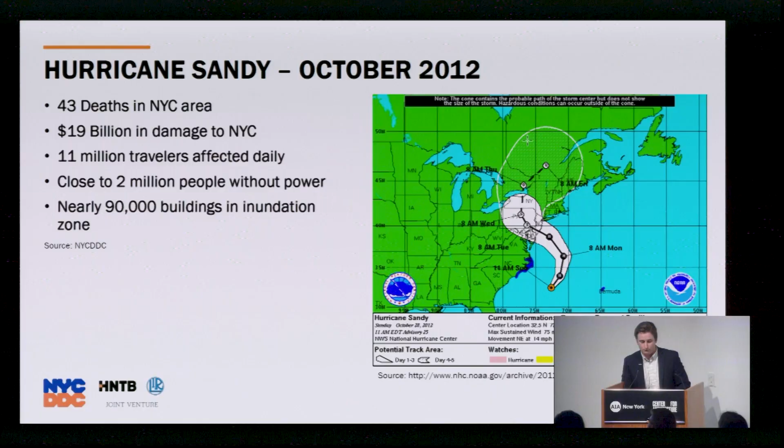Before I get into the design overview, I just want to give thanks and credit to the large project team that we have. This is a massive project, and I am by no means the lone designer. I'm part of the construction management team of HNTB LiRo-Hill.

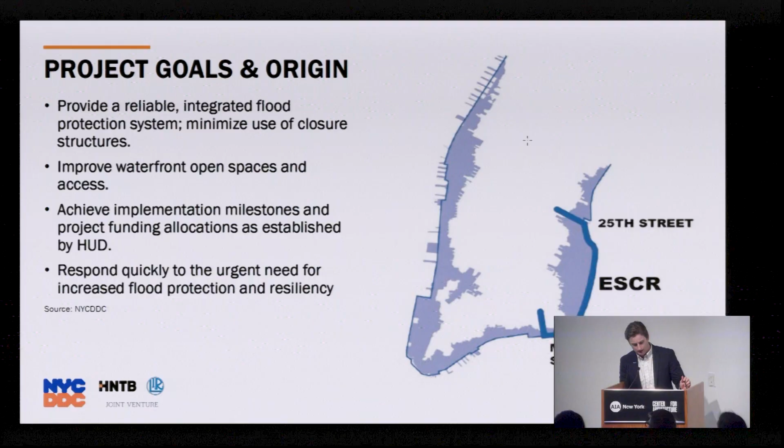The ESCR project ranges from East 25th Street all the way down to Montgomery Street. The main goals of the project and the program are to provide a reliable flood protection system with minimal use of closure structures such as roller gates and swing gates, improve waterfront open access and access to these spaces, and quickly respond to the urgent need for flood protection and resiliency in the Lower East Side.

So the site is 2.4 miles long, and it's now all protected under one program. You'll hear me talk about Project Area 1 and Project Area 2. Project Area 2 is to the north, shown on the plan to the right in gold, and that contains more of the active flood measures, such as flood walls and flood gates, as well as 3 parks.

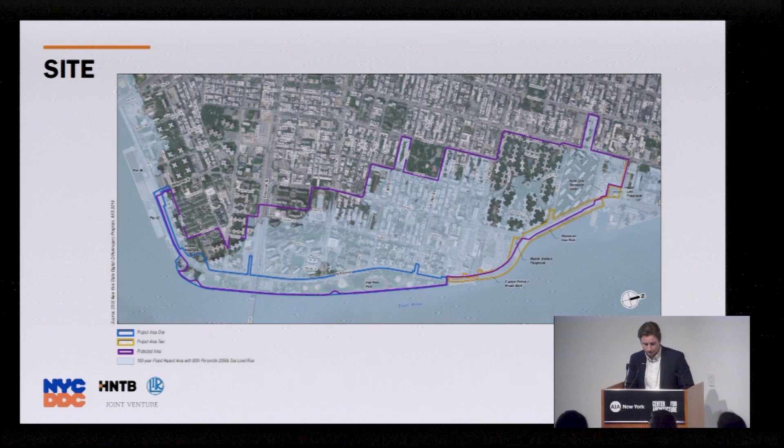Project Area 1 is the larger East River Park that runs from approximately East 15th Street all the way down to Montgomery Street, and that's the new raised East River Park itself. There are also several gates to the south. Speaking of raising the park, the existing esplanade, the previous esplanade, was 8 feet.

The new design elevation will be 16.5 feet, which is above the freeboard and wave requirement on the high end of the 2050 FEMA projection. So that's what the diagram on the right is showing.

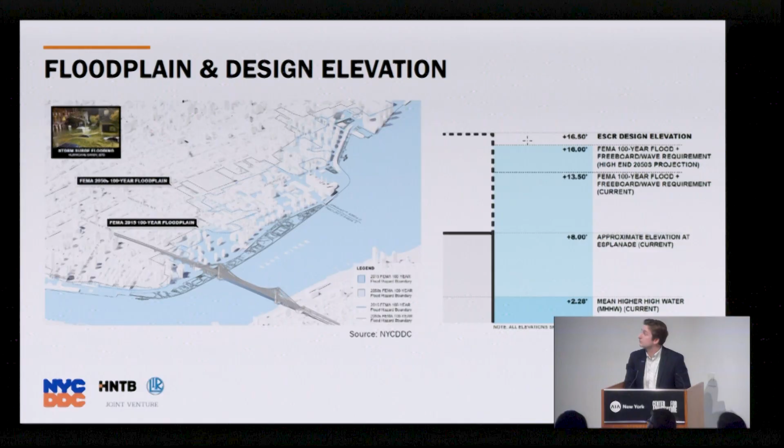This new elevation is being accomplished by the fill in the East River Park and the gates, and I'll show construction photos of these in a few slides. So just the high level future condition of the new park.

With number 1, those active measures I was mentioning are the flood walls and flood gates, in project area 2 to the north, and we have several in project area 1 to the south.

The elevated park itself, in green, number 2, the raised parkland, getting to that 16.5 feet. We also have interior drainage and below ground flood protection, such as a buried flood wall and seepage barrier. That's the orange line running from project area 1, where the project area 1/project area 2 demarcation is, all the way down to the flood walls in the south by Montgomery Street.

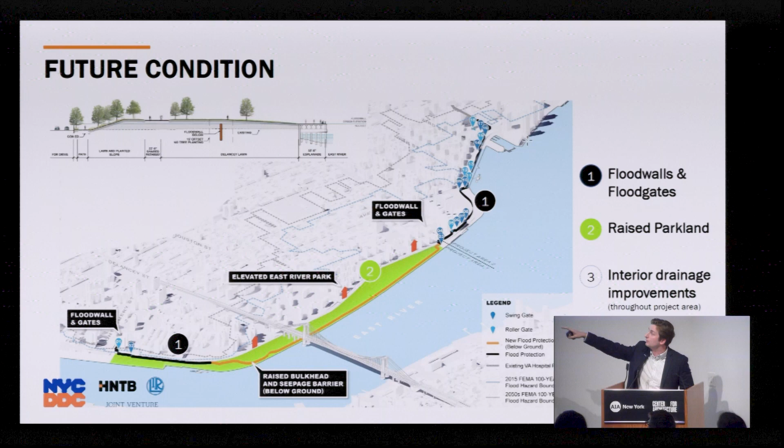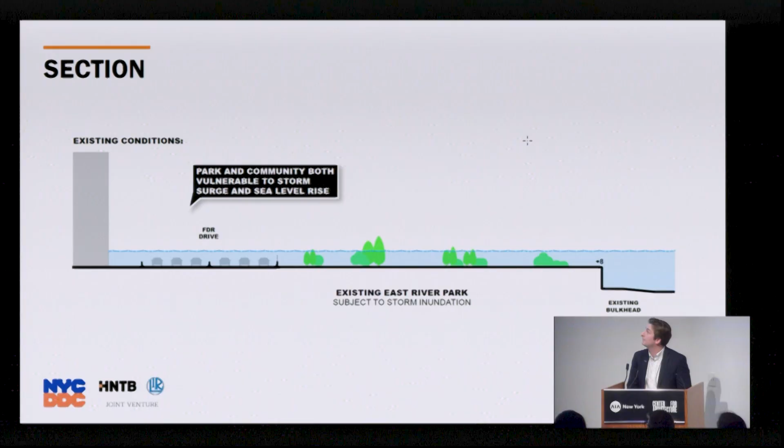A diagrammatic section quickly showing the existing and the new condition. In the existing section, water goes into the Lower East Side, and then the new park has buried flood protection.

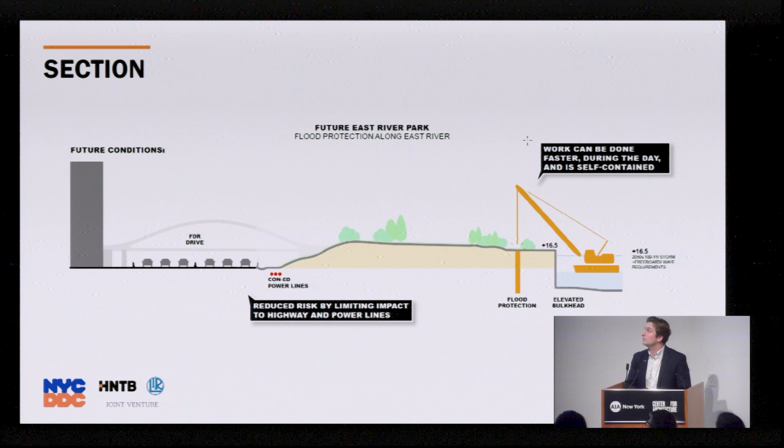We brought in fill by barging. A lot of the construction is done from the barge, minimizing truck trips and disrupting communities with truck trips along the FDR.

I'm going to quickly go through a rendering flyover so everyone can get their bearings. These are a little bit dated, so if you see something that's not there, it might have changed, but this will give everyone an idea.

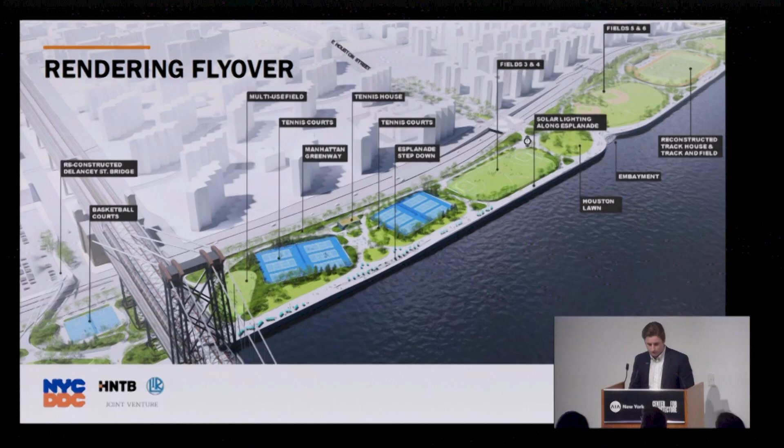Moving up farther along project area 1 by the track and East 10th Street, we have new track and field areas, a new track house, maintenance yard, and comfort station. That's the end of project area 1.

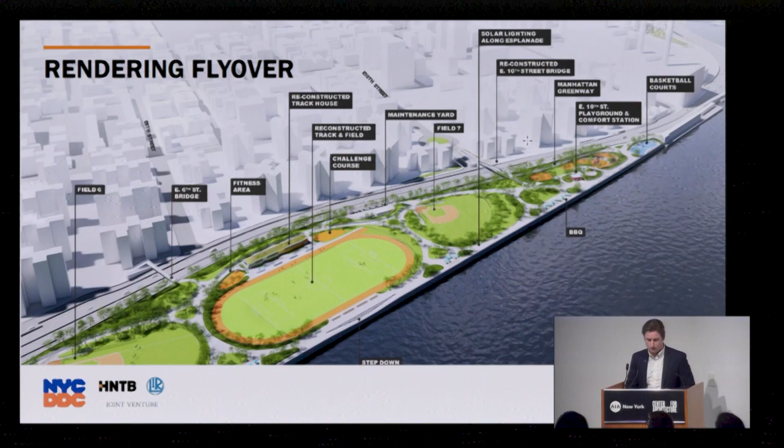Now project area 2 has those 3 parks that I was mentioning, and the flood wall and floodgates. So now I'll get into the construction progress of the park.

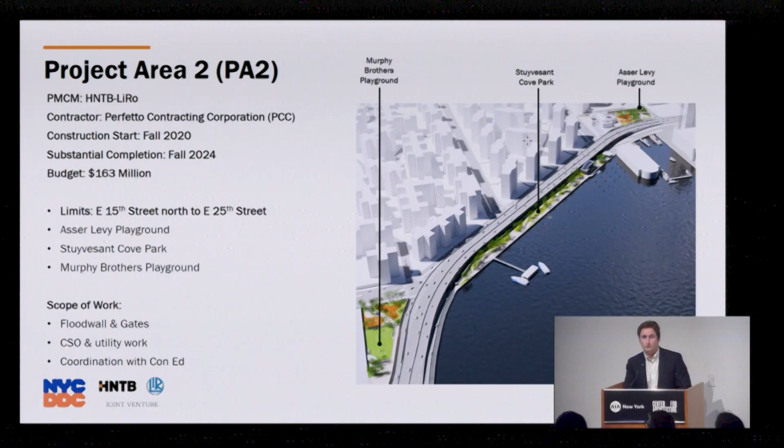We'll work our way back down from project area 2, then back down to the south. Project area 2 was started in the fall of 2020 and is now substantially complete as of last fall. This includes 3 parks: Asser Levy Playground, Stuyvesant Cove Park, and Murphy Brothers Playground, with a total budget of $163 million, completed $10 million below budget and ahead of schedule.

Some construction highlights now, and there are many for both of these project areas, but I'll try to keep it to the most impactful ones.

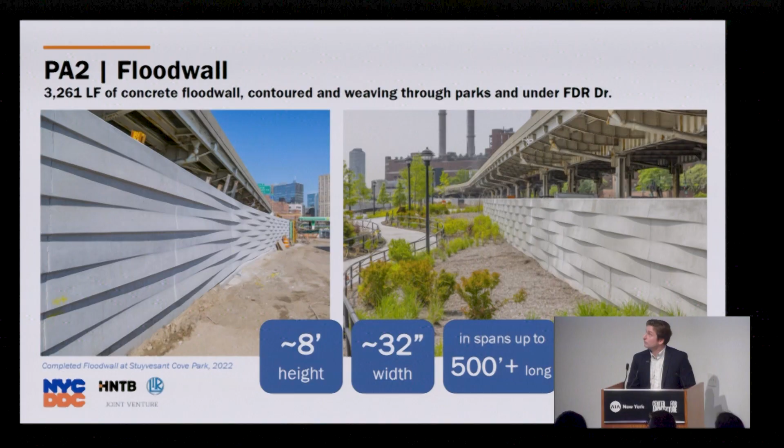For PA2, we have a flood wall. It's a textured flood wall above and below grade, over 3,000 linear feet, running through the parks and under the FDR. It also has moldings along the floodgates that show the different sea elevations.

For the roller gates in PA2, we have 12 very large swing and roller gates. These will remain primarily in an open condition. They'll be tested once a year, closing them to make sure everything's working, and they'll only be closed during a flood surge event.

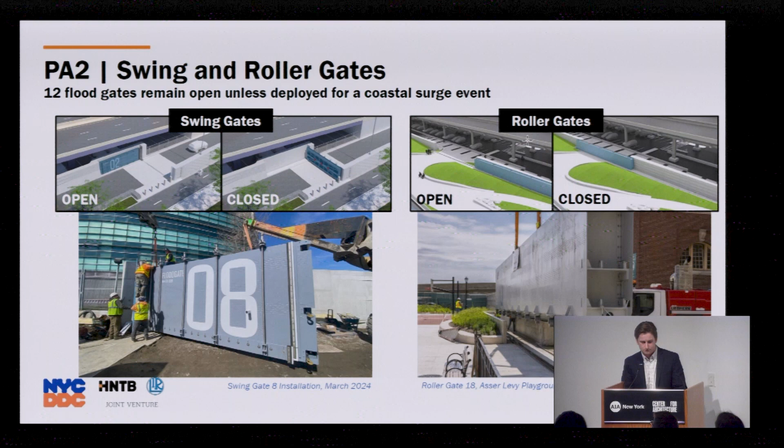And of course, the completed parks and playgrounds in PA2. This one is Stuyvesant Cove Park, where you can see the flood wall, vegetation, and seating along the esplanade.

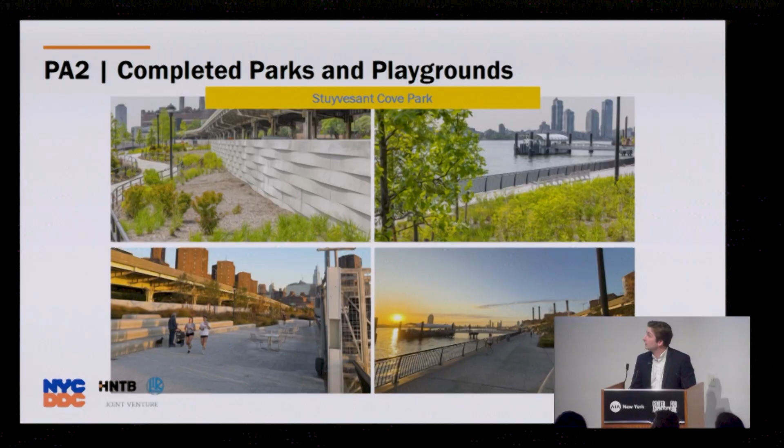Now moving farther south back into PA1, project area 1. It starts at East 15th Street and runs down to Montgomery Street. We started this in fall of 2021, and the projected completion right now is end of 2026.

It includes 3 bridges, the park raising, new amenities that I previously showed in that rendering flyover, and a total budget of $1.27 billion. This is the largest infrastructure project ever managed by DDC.

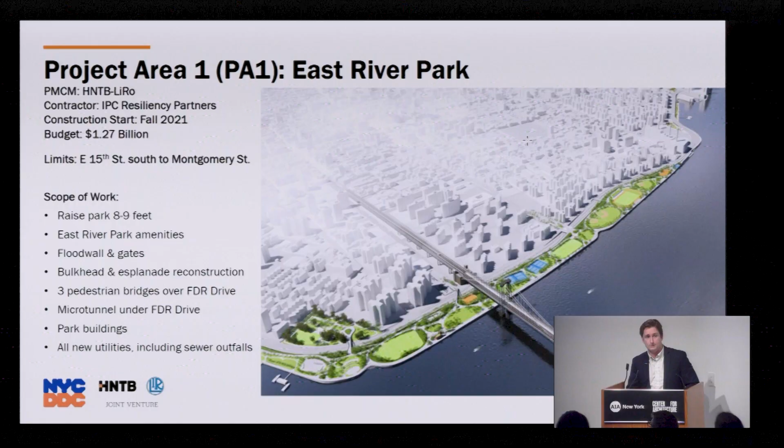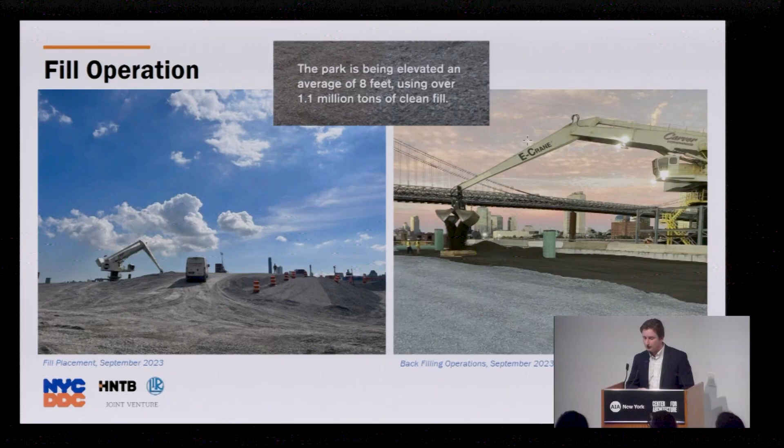The team will be bringing in, and has brought a lot of this in already, 1.1 million tons of clean fill. This will get us up to that new 16.5 foot elevation, again reducing those truck trips along the FDR. The new esplanade along the East River.

Also being done via barge. And this is one of the key sustainability features that we're using in the Envision rating system.

This is all precast risers now, also being done from the river. This would reduce 1,600 truck trips of concrete if we were to cast in place, which originally was supposed to be done, and we ended up value engineering and using precast risers.

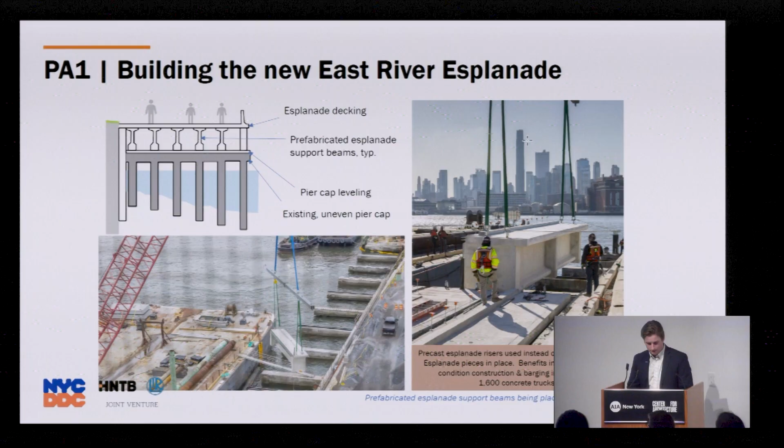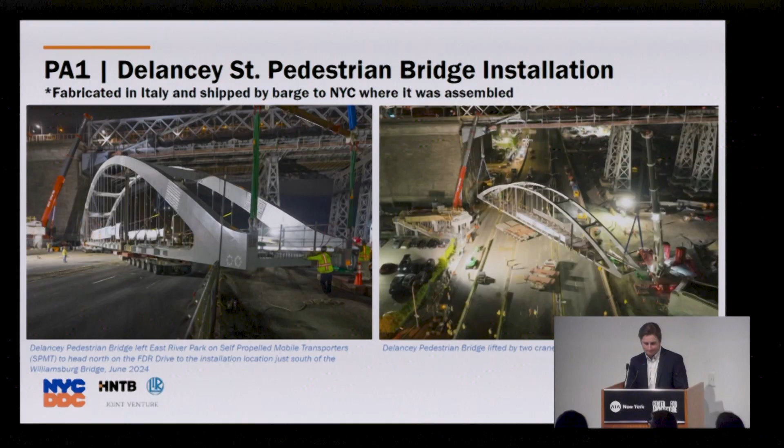And of course, the park itself. One of the big commitments of the entire program is to have sections of the park always open to the community, so the project is in a phase where sections are open.

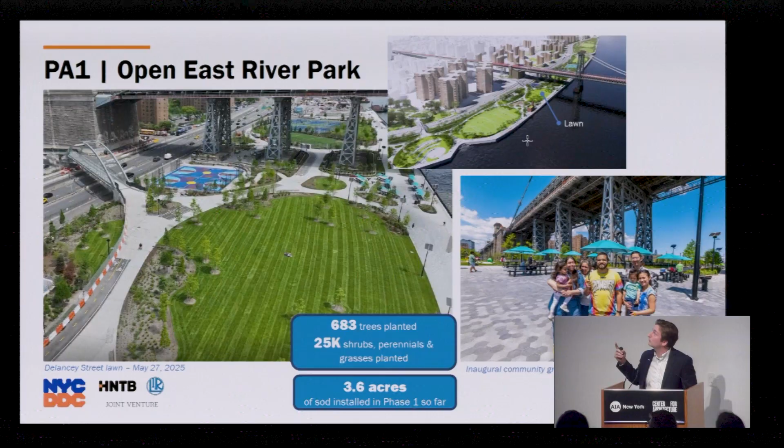In this picture, you can see the Delancey Street Bridge and lawn, the open basketball courts, and on the other side of the Williamsburg Bridge, the new tennis courts. We also had an inaugural community grilling this May.

So moving on into the rating systems. The project received - this is my main portion of the project. I was primarily involved as the Envision and WEDG sustainability professional on the project, and it's still ongoing.

Let's jump to that real quick. ESCR received the initial gold award for Envision - that's the award on the left, in the summer of 2022.

We used a forensic application, meaning we implemented this at 95% design completion. We started that process in fall of 2019, and it's gone through many iterations. Envision has 64 credit cover sheets, and we were able to achieve 414 points of applicable 944 points.

We're still going through the construction document collection process. We have about 10 credits that are in the construction phase that we'll resubmit to get our final award at project completion. And just after the Envision award, the project received the WEDG award in the fall of 2022.

We were able to use a lot of the Envision credit cover sheets to do the WEDG sheets, and we quickly put together the WEDG application in about 6 months. So we got the WEDG verified award. WEDG is just pass-fail, so we were able to also get accolades for that on the project.

I'll quickly highlight some of the credits that really stand out for us to get maximum points on the rating system. One of the goals of ESCR and the LMCR project is to improve the quality of life. How did we achieve this credit? We had a robust community engagement process, and we used the environmental impact statement for a lot of the credits. That was really probably our Bible for getting a lot of the credits, as well as the construction drawings.

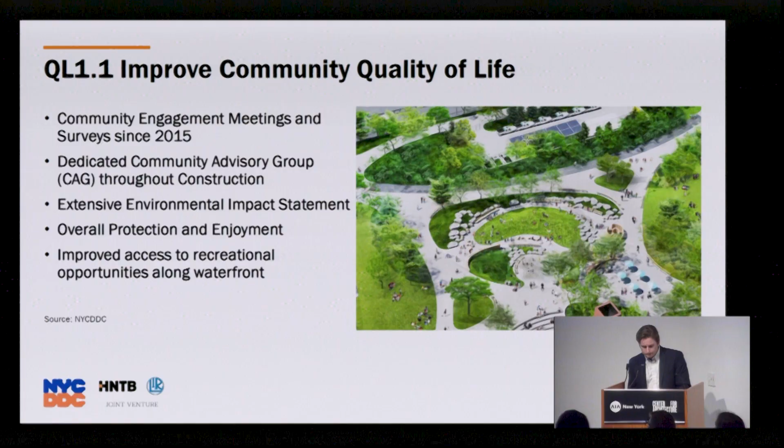And then, of course, the improved overall protection and enjoyment, as seen in the improved access to recreational opportunities for the community along the park and the East River.

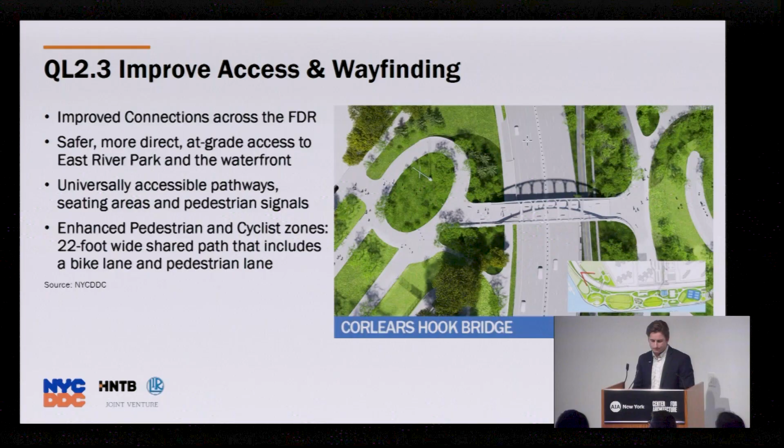And speaking of the community, the project also excelled in combining flood protection and a new park. This is achieved by our new connections across the FDR, which are more direct - it's not just going up and over, it's more that if you're at that height of the bridge, you're going right into the park. We had an enhanced pedestrian cyclist path going through it.

And then the main goal of the project, which is flood protection and resilience - the integration of the raised park, the flood walls, the gates, the below-grade flood protection, the reconstruction of water and sewer infrastructure. ESCR could have just been a wall, but it shows that flood protection and community spaces can be a common goal. And that's it.

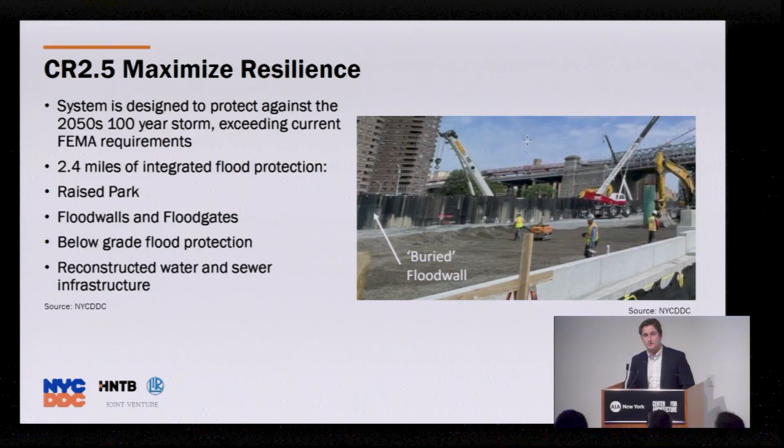My name is Matthew Stout from Office for the Next Environment. I'll be presenting the Financial District and Seaport Climate Resilience Plan. I'll also note that our firm is the architect of record for the ESCR flood wall you saw there, so if you have any comments or criticisms about the wavy form wall patterning, you can direct those to me.

I'm proud to present a quite ambitious plan for Lower Manhattan. First, I want to acknowledge that it really takes a city to build a city, and this is the culmination of several years of planning work with several contracts, contractors, and designers involved. Now we are at concept level design, and I'll walk you through some of those ideas.

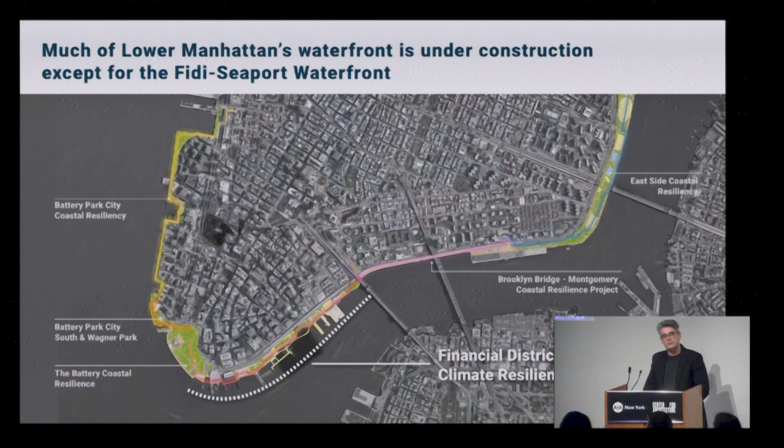Right now we're looking at the tip of Lower Manhattan. We just talked about the East Side Coastal Resiliency Project, in the top right corner, and the FiDi Seaport area is highlighted at the bottom, essentially from the Battery to the Brooklyn Bridge. Most of the waterfront you see in Lower Manhattan is either under construction or about to be, but this area particularly has taken longer for the planning work because of its complexity, due to the transportation infrastructure and other elements along the waterfront.

So again, the project area is from the Battery to the Brooklyn Bridge. You can see in this diagram this is really a host of all kinds of transportation infrastructure for the city. While not noted here, there are 5 subway tunnels that move underneath the East River, and 3 ferry terminals. As sea level rises, the analysis shows that much of this waterfront will be impacted by frequent tidal inundation by the 2050s.

That's the area in magenta there. So we're talking about Wall Street, the Pier 11 ferry terminal, the downtown Manhattan heliport, Pier 16, and the Esplanade. Most critically, at the southern end of the project area, the Battery Maritime Building, where the Governors Island Ferry currently exists, will be inundated on a regular basis by the 2050s, as well as Whitehall Ferry Terminal between the 2050s and the 2080s.

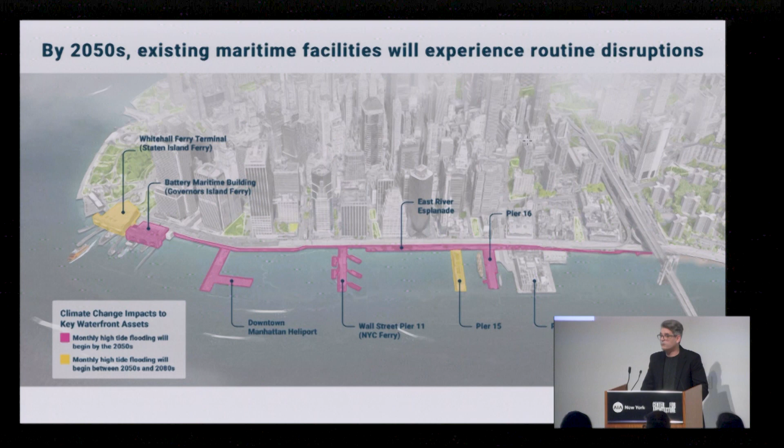So this was the real challenge for this project: to find a solution that integrates flood defense and also thinks forwardly about all of these transportation assets along the waterfront. And how do you really fit all of that along such a narrow strip of land?

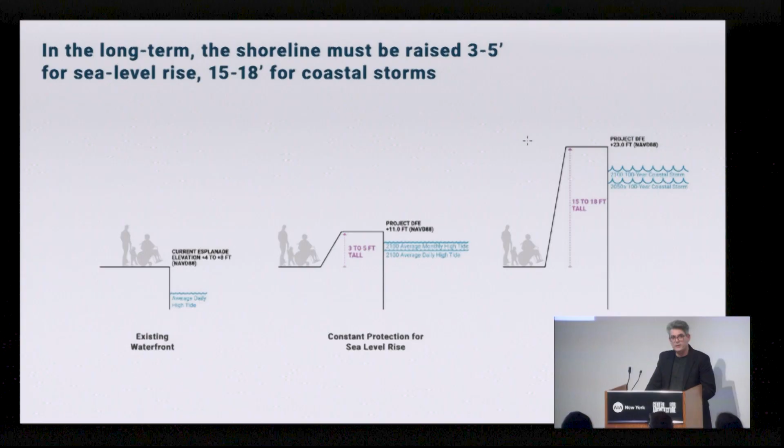In terms of elevation, as we look at sea level rise, this waterfront by the 2100s needs to be raised 3 to 5 feet higher than it is today, just to protect against more frequent storms and sea level rise. But if we're talking about the next Hurricane Sandy by 2100, that's flood defense of 15 to 18 feet higher than existing grades — well over a story high.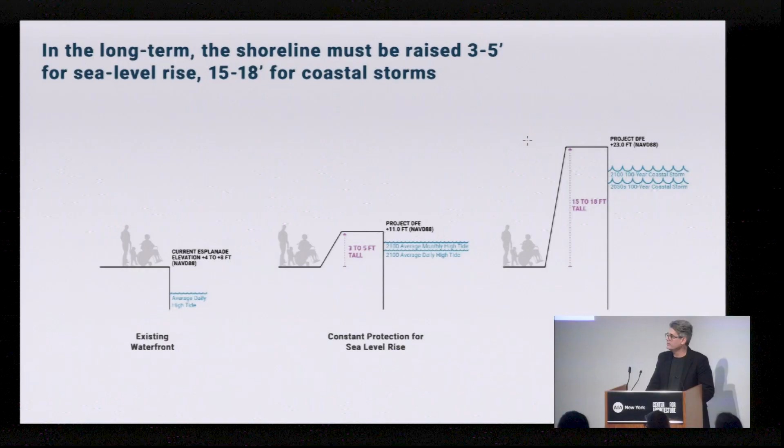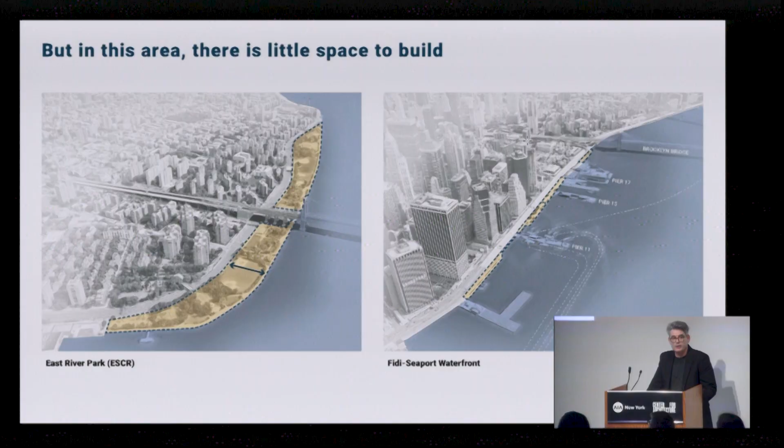So I'll step through a few diagrams that show the general idea of the project, and then share with you some visualizations of the current status of the design.

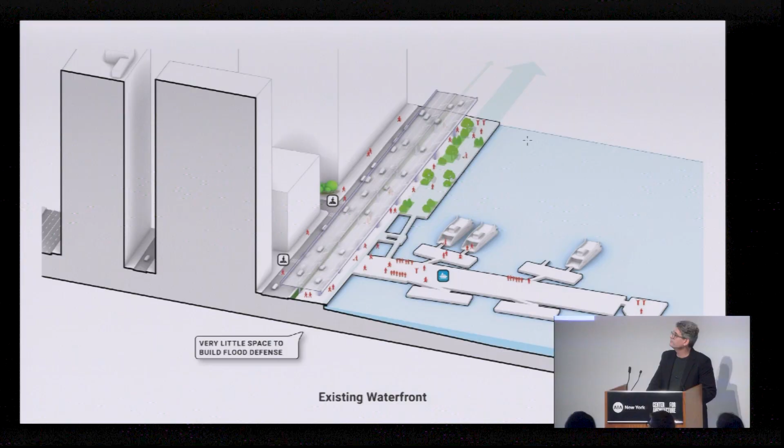Here we're seeing the conditions as they are today, diagrammatically. This is essentially near Wall Street — the pier there is the Wall Street Ferry Terminal and the FDR. So the core idea of the project is to build out into the water and claim space from the East River, to create a resilient waterfront that integrates public amenities.

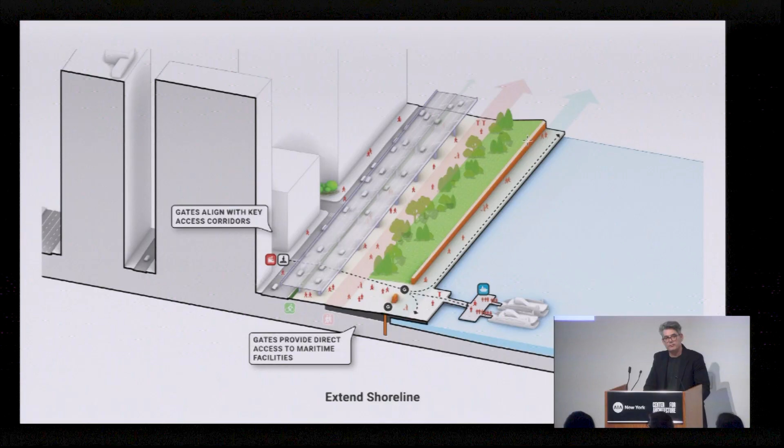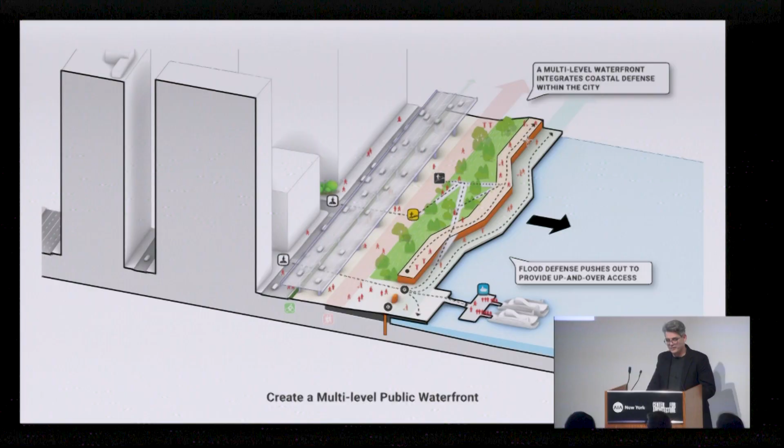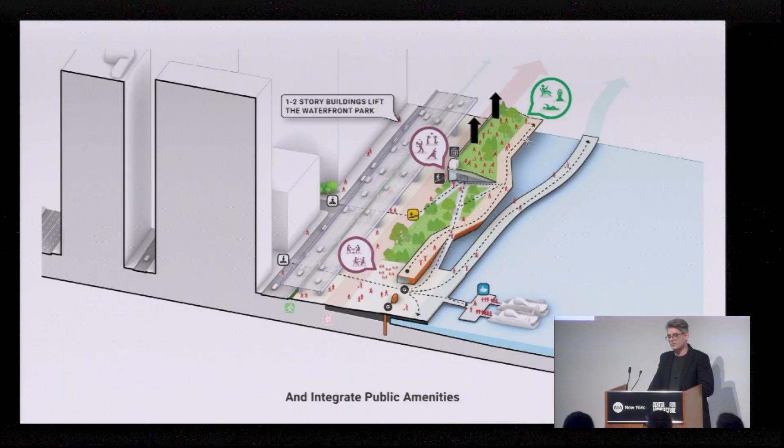The first basic step is that we need to extend the shoreline in order to provide that passive level of flood defense for our maritime assets. Then we want to take advantage of this opportunity to create a multi-level waterfront that doesn't wall off people from the water, but creates a new linear park that this area definitely deserves. Lastly, with this space in the water, there's opportunity to integrate amenity buildings and other assets along the waterfront, to really activate the space and provide more opportunity to view and experience the waterfront.

So what does that look like more technically? This is a section showing near Wall Street, at what we'd call a typical location of the waterfront. At its max, the proposal is to extend up to 200 feet into the water and create a linear park that is universally accessible, less than 5% grade, leading up to an elevated promenade on top of the flood defense.

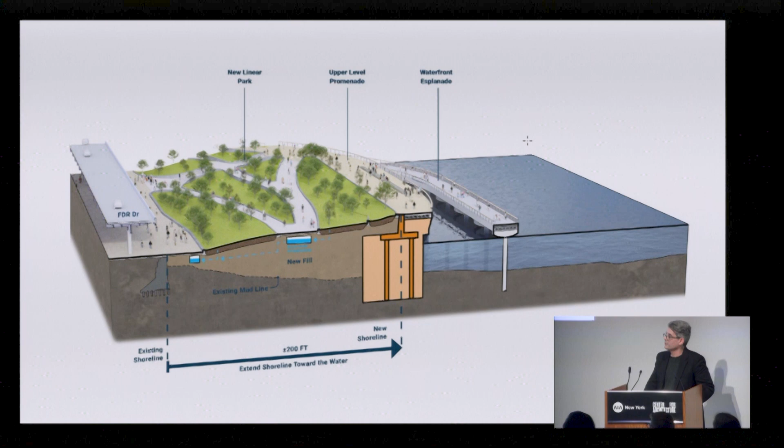But what's important about this project, as you'll see in the images, is that we can't just raise the edge. We need to create two levels, so that you always have this lower waterfront esplanade — that's what you see on the right side. Along with this, the team is integrating stormwater detention measures, et cetera, within this landfill.

At more technical locations, say at ferry terminals, this is what the design would look like. This is actually at Old Slip, where we have one of the subway tunnels going to Brooklyn. This is an area where we will have a bridging structure that spans over the subway, and also

a series of floodgates that would provide direct access to the maritime facilities. The plan proposes new amenity buildings on the dry side of the flood defense, as well as terminal buildings. Outboard of that flood defense, you have an esplanade as well as an upgraded ferry facility.

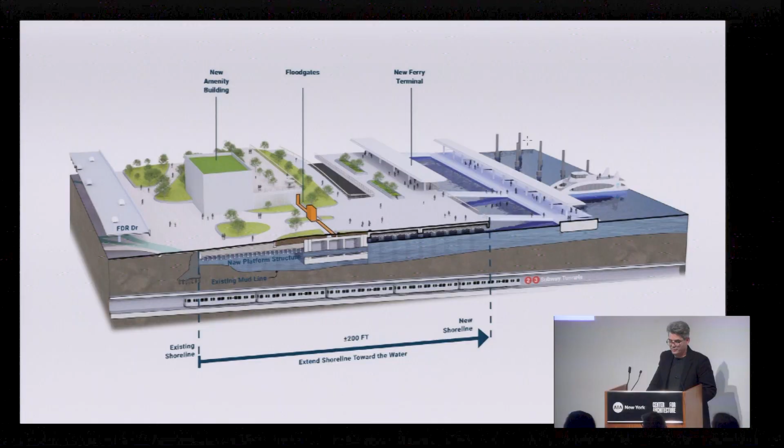Backing up, this is what the overall vision is like today. Again, we are at concept level design. We imagine over the course of several years, this design will shift and change. But there are a couple really large moves here that we want to talk about that we're excited about.

The Battery Maritime building would be protected and adapted for new public uses. The heliport would be reconfigured and located in an area that will be not only suitable for heliport operations, but also be ready to receive freight and other waterborne deliveries as those kind of blue highway systems start to come online.

Pier 11 becomes a much more expanded ferry terminal near Old Slip. Really, again, the idea here is to, if we're going to rebuild this waterfront, let's plan for future expansion and really embrace the harbor as a transportation asset.

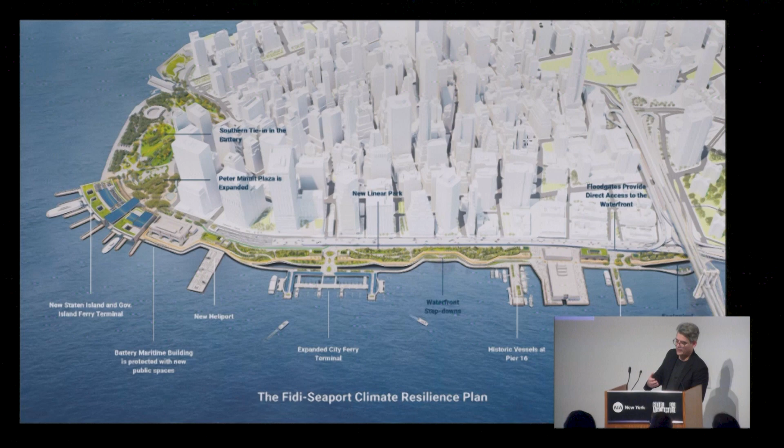And then moving further north, it's really important to embrace the historic character of the seaport area and ensure that access to these piers are maintained and really do have that kind of finger pier logic that is so natural to that historic district.

So this is the waterfront as we see it more or less today, and this is a vision of what it could be in the future. Again, the new combined ferry terminal to the south, and the linear waterfront park as you move further to the north.

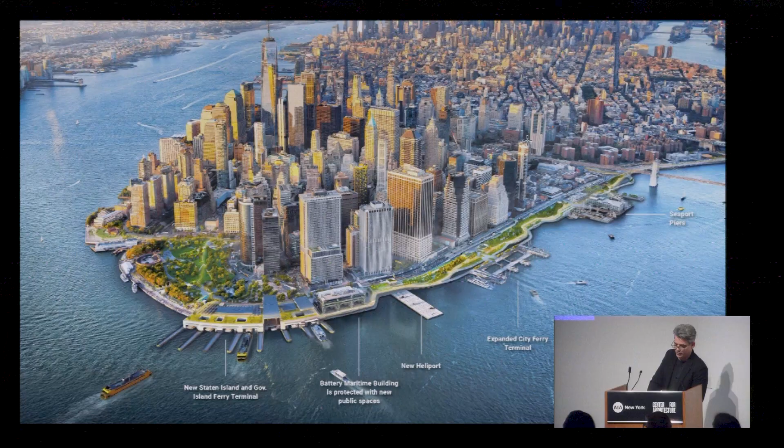This is a view looking at the Pier 6 heliport, more or less on top of the Battery Maritime building looking north. In this area, it was really important for us to create a passive green space adjacent to Veterans Memorial Plaza. Here's what that space could look like.

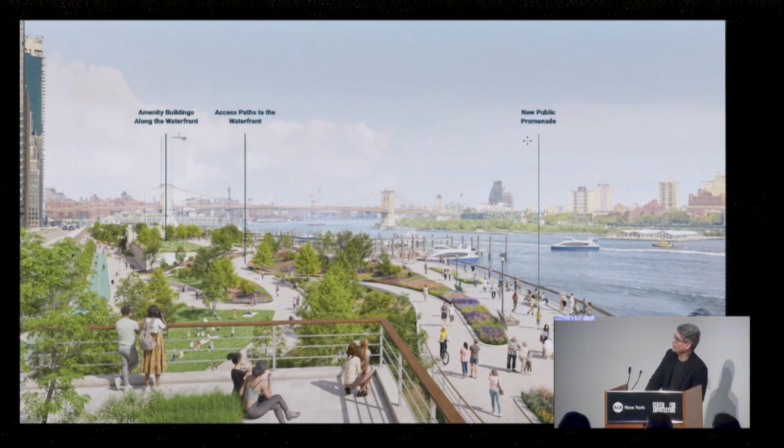This is really an example of those sloping paths that I was showing in the previous graphic that would lead users up to an elevated promenade that would overlook the waterfront.

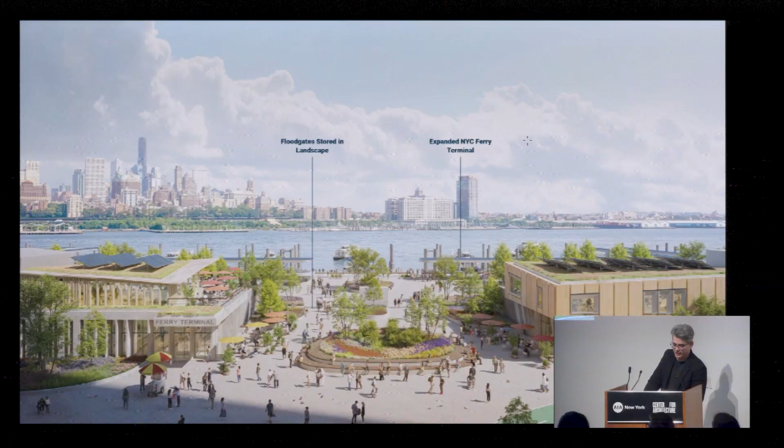Here's a view at Old Slip at the new city ferry terminal. This is kind of an example of what we would coin gateway entrances for this project. There would be two floodgates that would be stored within the elevated landscape such that on a day-to-day basis, users could walk directly to the waterfront here, knowing that this would be an area of very high circulation.

Moving a little bit further north, we're looking toward Pier 15 and the seaport area today. This gives you a sense of what this waterfront could become in the future.

It was really important for us not only to find ways to address all of those maritime access and facilities needs, but to find space along the waterfront that can be really more passive and more park-like and allow users to always get closer to the water.

So this is one of those zones where we are imagining a kind of waterfront-facing amphitheater, if you will, so you can get closer to the water.

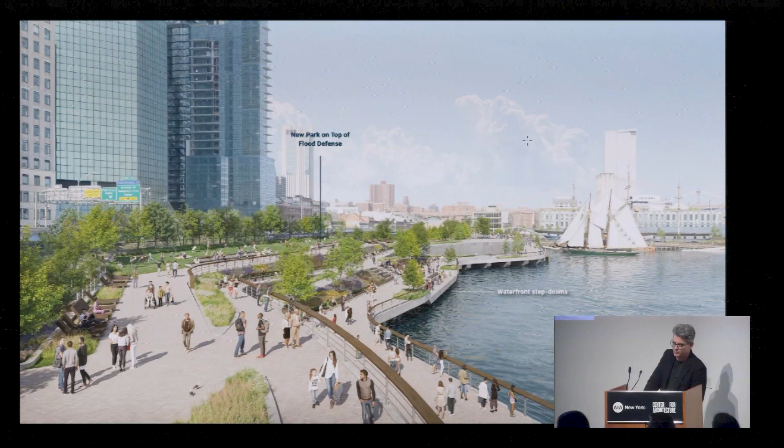Here's another image in the seaport area today, and what it could be in the future. So what you're seeing here in the foreground is another floodgate opening at Fulton Street. Again, you could walk directly to the waterfront. And then we have this elevated landscape that stores the flood defense in an integrated way.

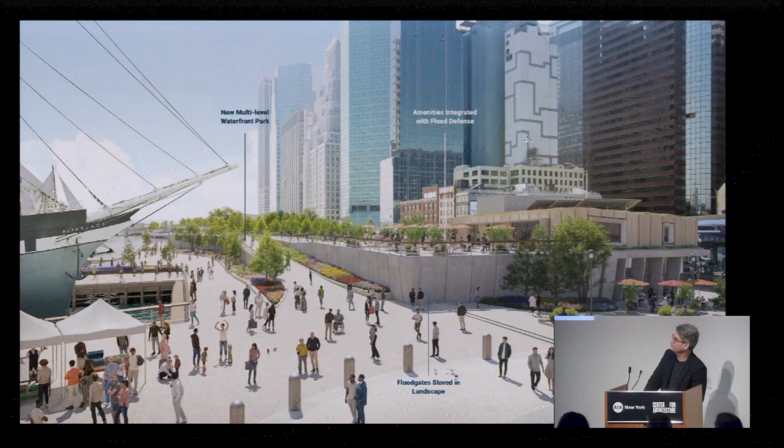I'll close out with this last image, essentially from on top of Pier 17, looking to the south. This gives you a sense of what this waterfront could feel like. Again, the idea is to really create a kind of bi-level space that integrates transportation assets, public open space, and other amenities along the waterfront.

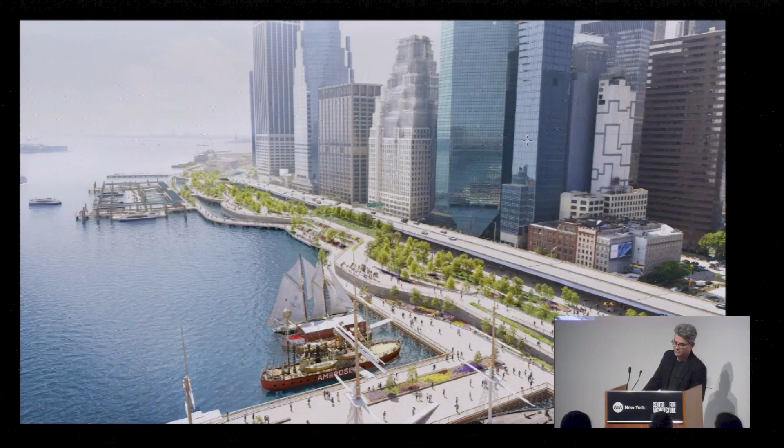Hello, my name is Ryan Connolly. I'm an architect at Thomas Pfeiffer Partners.

I'm talking about the South Battery Park City Coastal Resiliency Project, specifically Robert F. Wagner Jr. Park and Pavilion. I'm speaking from my role as an architect at Thomas Phifer and Partners, but I also want to acknowledge the larger project team, particularly AECOM, who's the prime on the project and was responsible for determining the flood alignment and many of the flood protection and storm surge protection features.

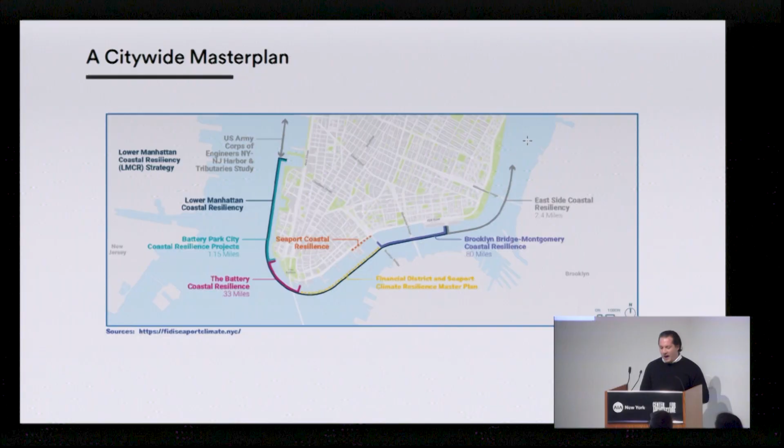The previous two presenters had a very similar image to this, just to situate you. We're Battery Park City, at the lower left-hand side of this map, and they'll tie into the projects to the east, which you just heard about.

So why Battery Park City? Similar to the previous presentations, we're considering not just what happened in Sandy in 2012, but what's going to happen in the future. This is a diagram showing the impact of a 2050s 100-year storm surge event in Battery Park City in Lower Manhattan. You can see it's a very substantial level of concern, with over 120 buildings which might be affected.

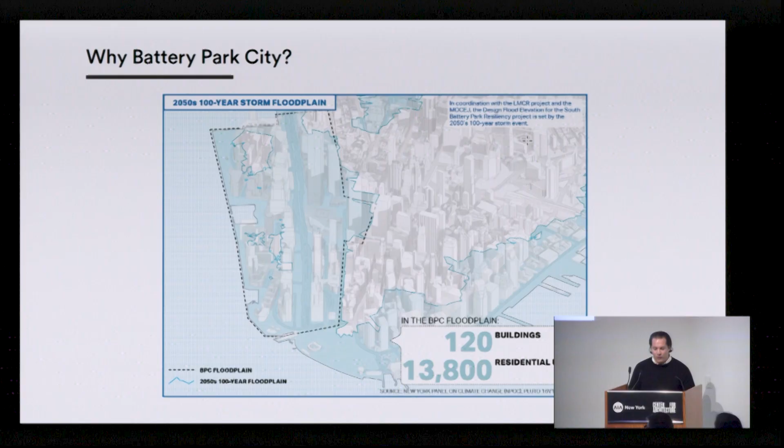Again, similar to some of the previous presentations, you can just see the scale of these coastal storm events. On the far left-hand side, you have the relative scale of Hurricane Sandy in Battery Park City. On the right-hand side, you have the anticipated storm surge from a 2050s 100-year event.

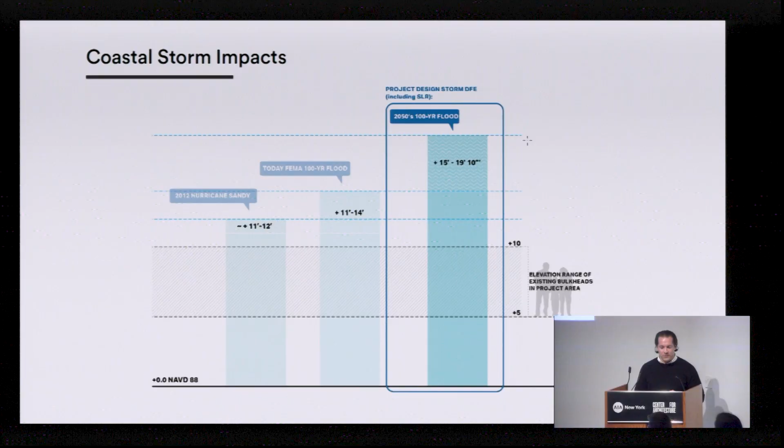Just to zoom out for a second and consider the history of the site, not to go into too much detail, but as a designer and urbanist, it's interesting that Lower Manhattan, particularly Battery Park City, has always been somewhat of a contested shoreline. It's really a man-made landscape, not the natural Manhattan shoreline, all the way back to Castle Clinton, which initially existed out in the water. Battery Park was extended to connect to it. In the mid-70s, landfill from the original World Trade Center was used to extend out into the Hudson and give us the land that became Battery Park City today.

On top of that landfill, the original Wagner Park wasn't completed until the mid-1990s, featuring a pavilion designed by Machado Silvetti and a landscape designed by Laurie Olin. It's in that context that Hurricane Sandy comes in 2012, and shortly thereafter Battery Park City Authority had to consider how to address the risk from future storm surge events in South Battery Park and in Wagner Park.

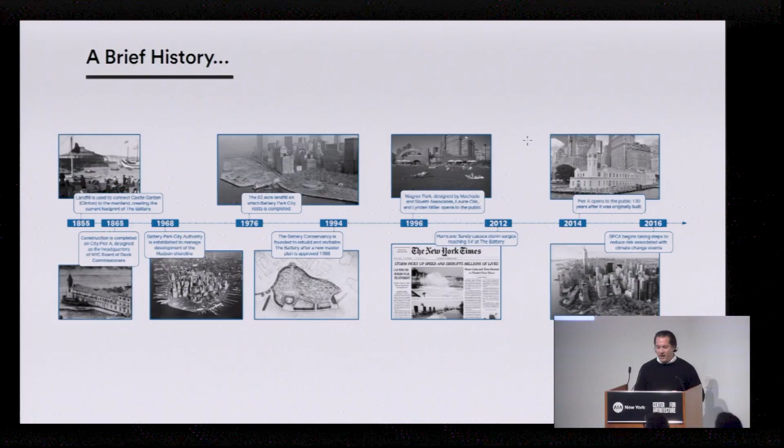The site presented several opportunities and constraints, probably mostly constraints. We're oriented here looking at the southwest corner of Manhattan. In the center is the original Machado Silvetti Pavilion and Park. To the left is the Museum of Jewish Heritage. To the right is Pier A, one of the oldest piers in New York City, and to the right of that is the Battery with the historic Castle Clinton. Dashed in, you can see the Battery Park underpass, and further to the east, the Brooklyn Battery Tunnel.

So there's a number of different conditions here. Not to forget, in front of the pavilion there's also a relieving platform. Matt spoke earlier about rebuilding the relieving platform on the Lower East Side. Here again, it's that contested shoreline—the relieving platform is actually a man-made structure, not a natural shoreline, and that offers its own limitations on what can be built there.

A number of different alignments were studied in the design phase.

I can talk through each of these areas. The project ended up being four discrete flood barrier and storm surge prevention projects: one along the north edge of the battery, another at Pier A Plaza, the third, which I'll talk in most detail about, at Wagner Park, and lastly around the existing Museum of Jewish Heritage.

These diagrams on the right, I found when preparing for this presentation, and I think they speak to one of the core issues in this project. The existing Wagner Park and Pavilion were a beloved community resource, and it was difficult for Battery Park City Authority and the community to understand and accept that the pavilion and the park had to change.

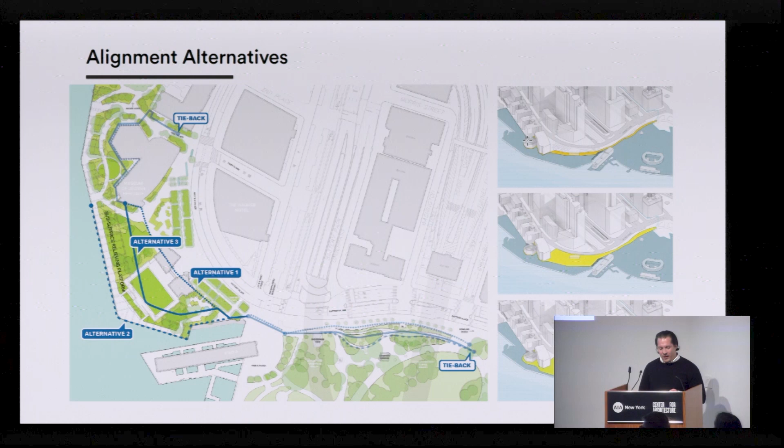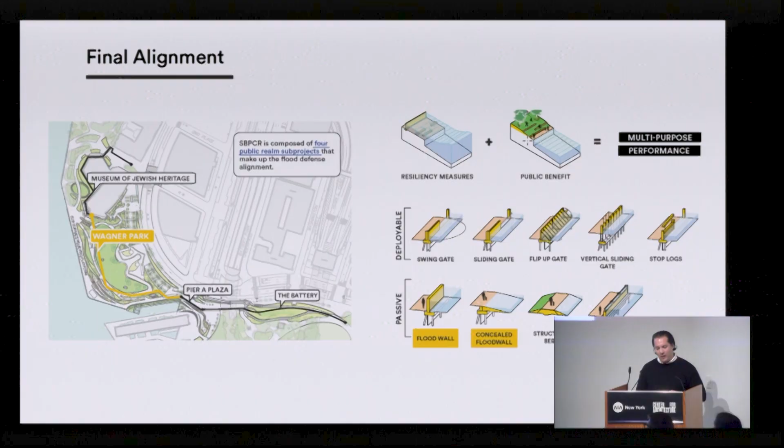Ultimately, the alignment elected for Wagner Park was a new buried flood wall, located as close to the water's edge as possible, just inside that limitation—the 90-foot offset zone from the relieving platform. A raised park, about 10.5 feet higher than existing street level, and a new pavilion that responds to the existing park and pavilion.

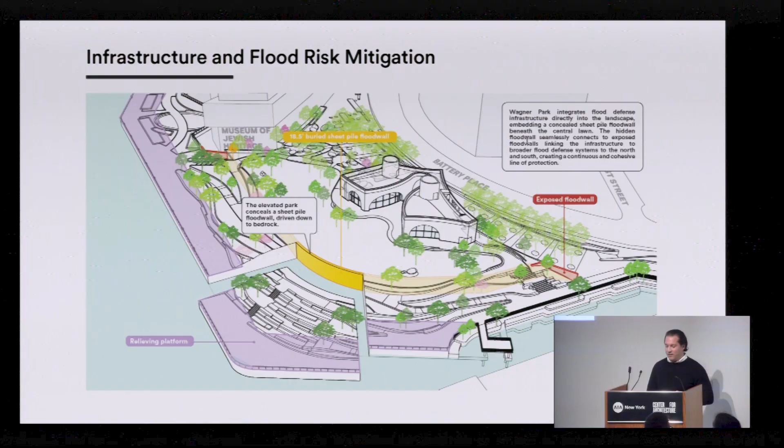I realize I'm already taking up a lot of time, so I'll go more quickly through this and focus on Wagner Park. Here's an axonometric diagram showing the location of that buried flood wall and the new park, and here it is in a construction photo.

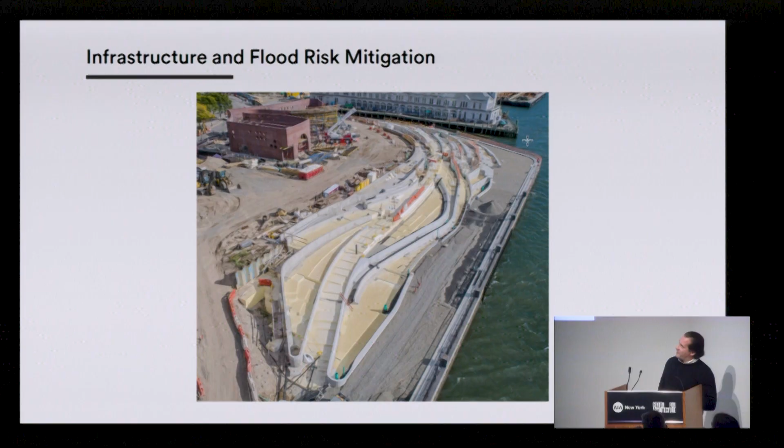You can see on the far left hand that corrugated sheet pile, which is the actual buried flood wall. To the right is the built-up landscape that cascades down to the relieving platform and the esplanade, and to the left you can see the new pavilion under construction.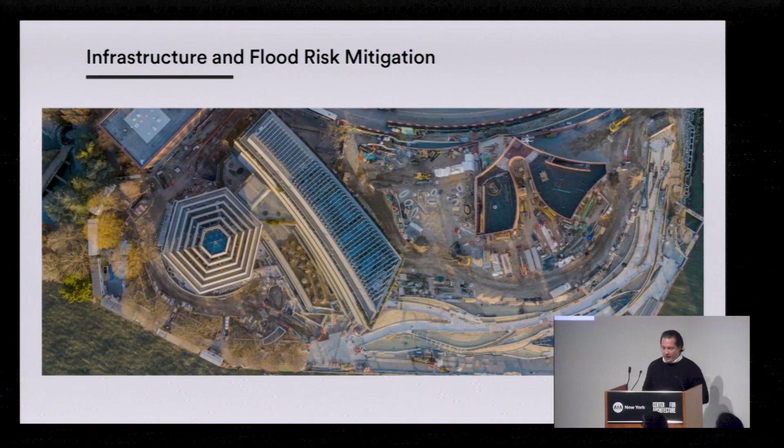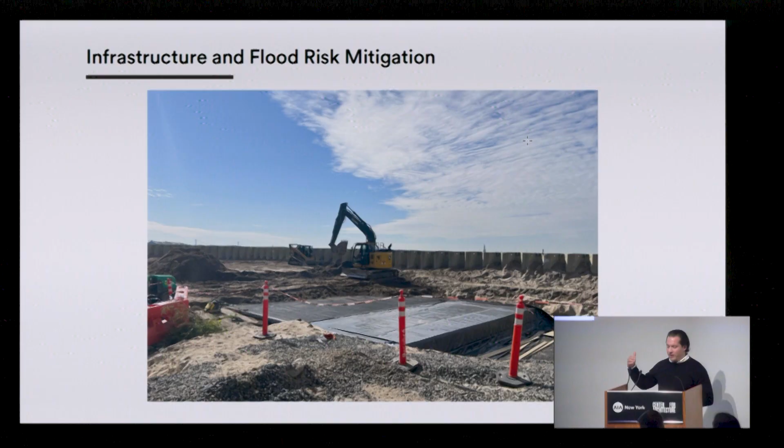Here's a photo of the cistern under construction, which is on the dry side of the flood wall. All of the storm water is collected on site in this cistern and used for irrigation on site.

Zooming into the pavilion, in our role as the architect, there were a couple major items we had to respond to, one of which was the design legacy of the beloved Machado and Silvetti Pavilion. In the new site plan, the site recreates the axial allée approaches—these allées of trees that gather in a central collector space at the middle of the pavilion, which opens up to a view out to the Statue of Liberty.

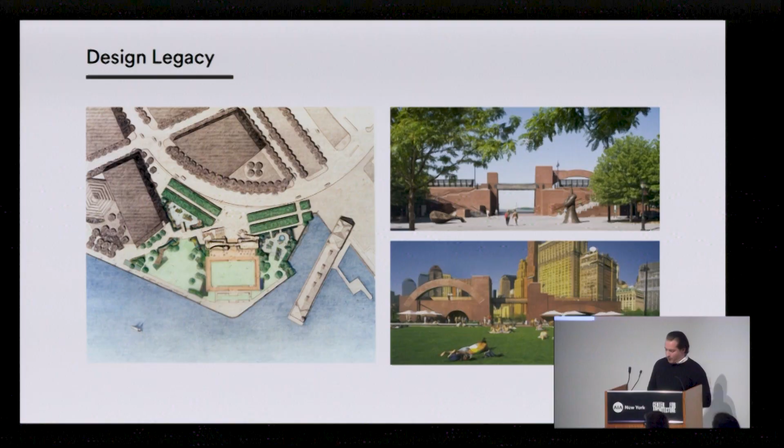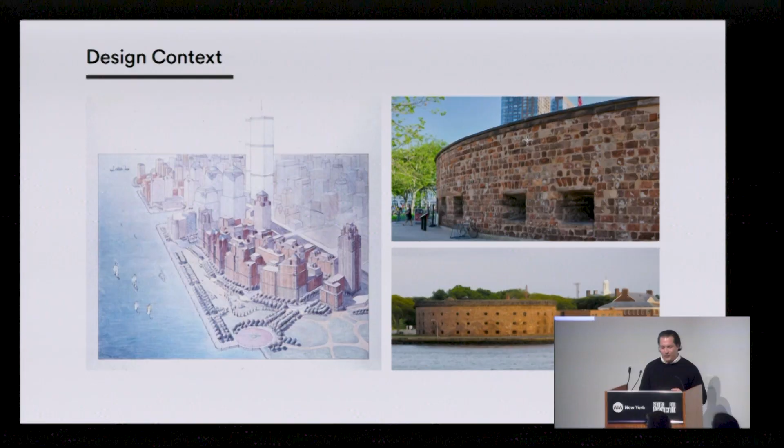A few images: the pavilion on the right, with its arches and masonry construction. We're also responding to the context of Battery Park City and the Manhattan Harbor. On the left is one of the concept renderings of Battery Park City with all the brick buildings. On the right, we have Castle Clinton, very nearby, and Castle Williams, across the way on Governor's Island. This masonry, waterfront, harbor, castle fortification language was something that gave us a spark in looking at the design.

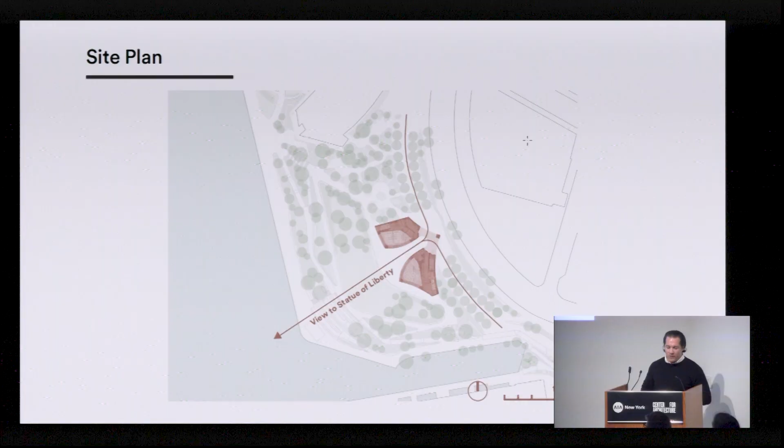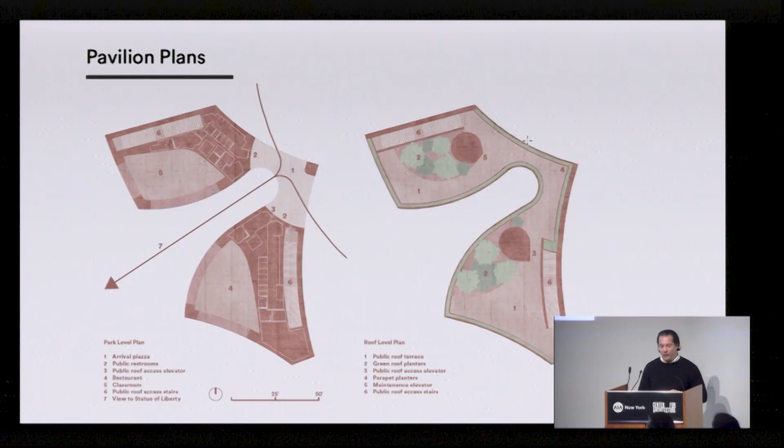Here are two plans. On the left-hand side, you can see the park level of the pavilion, very similar to the historic pavilion, with two wings. On the north is a community space, and on the south is a restaurant. On the right is the roof level plan, which offers a green roof and a publicly accessible roof terrace. Here are some of the elevations for the architects.

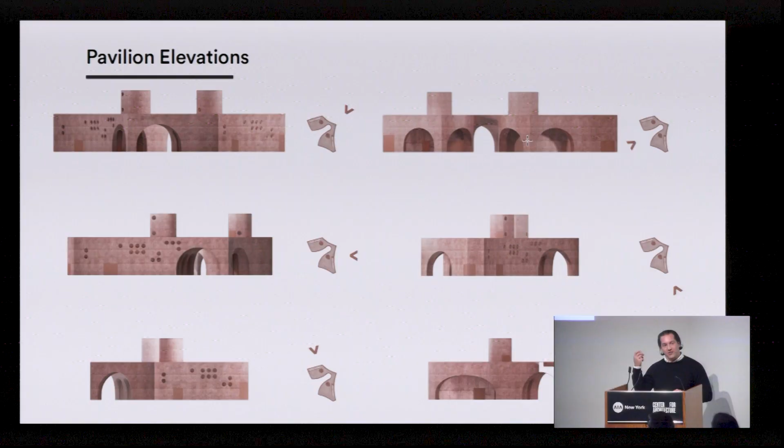I think one of the triumphs of the pavilion is that it changes as you move around it. It's got many different faces, you might say.

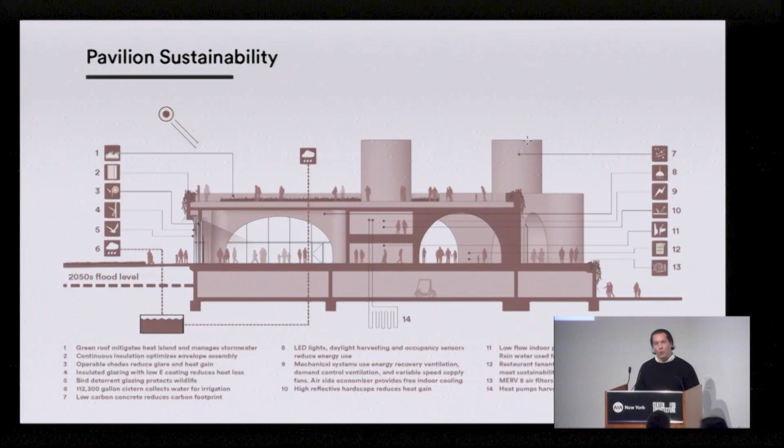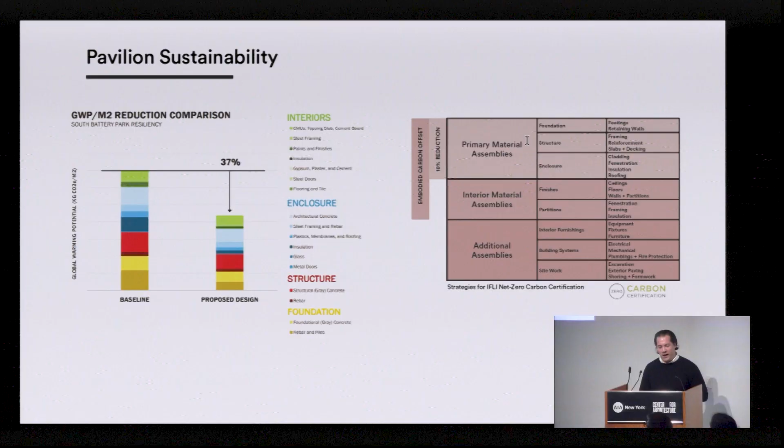For sustainability, the site was the 13th project nationwide to achieve WEDG certification, and the pavilion is currently pursuing ILFI zero carbon certification. The major way we're pursuing that is through reduction of the embodied carbon in the pavilion, accomplished primarily through cement replacement in the architectural concrete. We maximized cement replacement through the use of slag for a 37% reduction in embodied carbon.

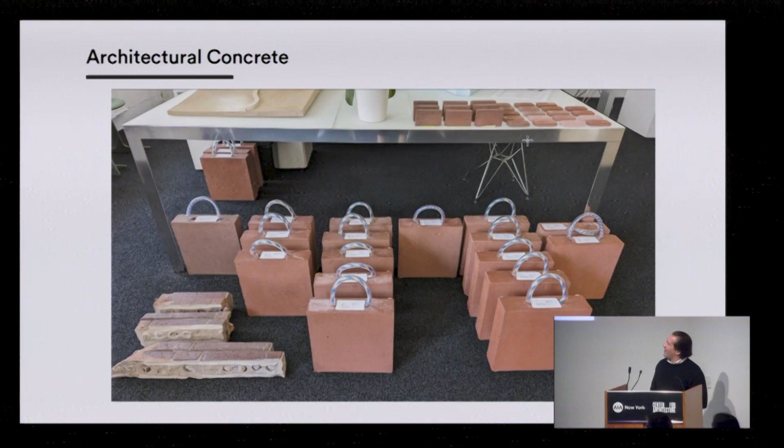We went through many samples—these are just some of the samples that are in our office. You can see some of the bricks from the historic pavilion for comparison. We also went through many full-scale mock-ups, and I'll talk about those challenges after the event here.

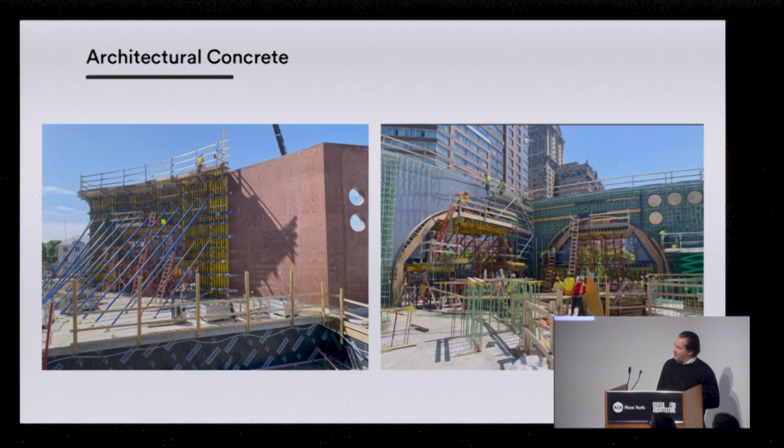Here's just a few of the construction photos. We're fortunate to have a great concrete contractor and team who did an excellent job. Some more of the construction photos, which are kind of sublime to me to look at now.

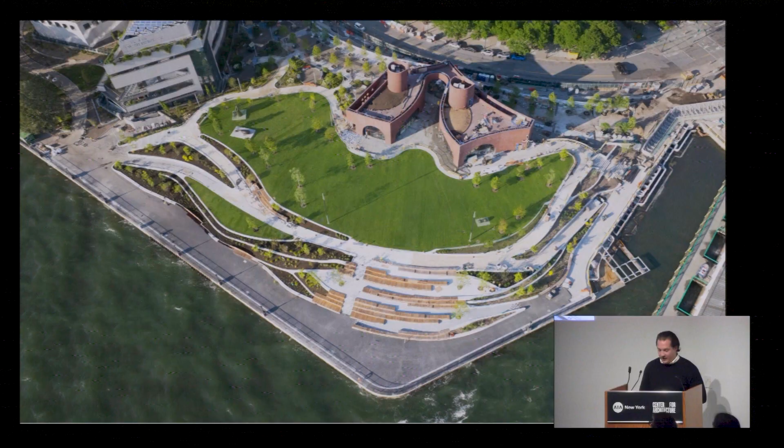And then just a few photos of the final pavilion. The park opened in July or late June, and the pavilion actually opened last week. So you can go visit, go to the roof, use the restrooms. The community room will be opening later this year, and the restaurant early next year.

So just a few photos of the park. You can see the Museum of Jewish Heritage there to the north, the Esplanade, the terrace steps that take you up right over the flood wall to the new lawn and pavilion, and Pier A, which is off to the right of this image here.

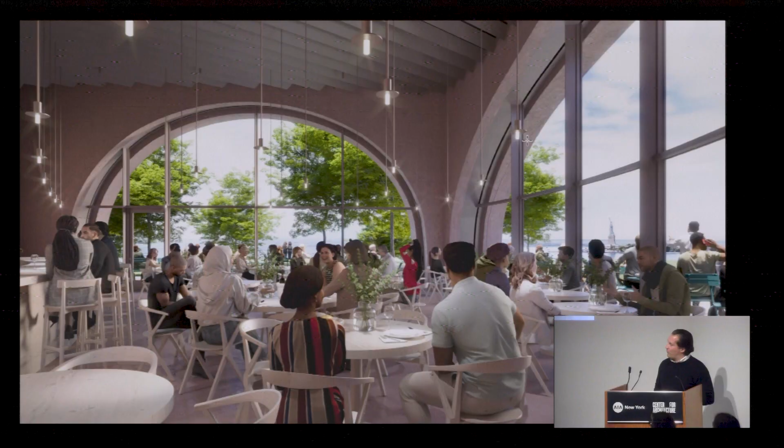Here's just a rendering of what the restaurant may look like. The interior rooms also have this red architectural concrete and offer these large arched opening views out to the harbor beyond. And so that's it.

I think right on time, hopefully. Thank you.

All right, my watch—is this working? My watch tells me we're not quite right on time, but I think it was worth it. What about you? Yeah, let's have another round of applause. These are three great projects.